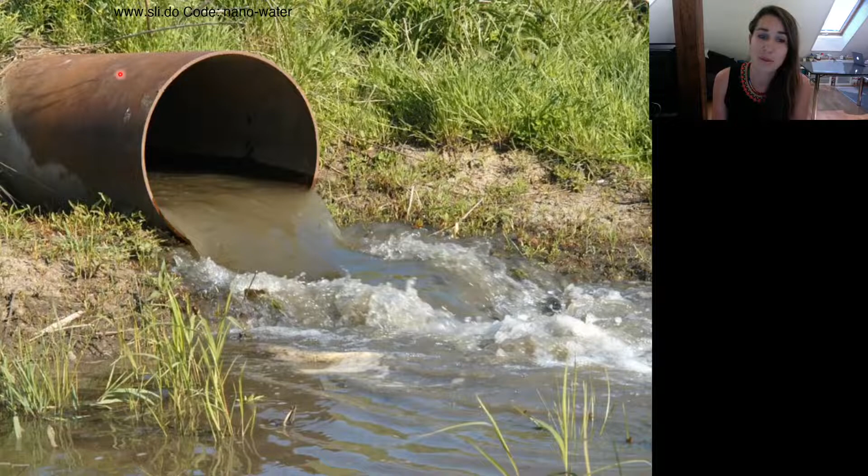Yet, we live in a resource-restricted environment and the population is growing, so we have to deconstruct our misconception about wastewater and understand that it's urgent to see it as a resource. The deconstruction is, however, difficult. Wastewater is not the most glamorous topic ever, so it's smelly, it's disgusting. It's not the type of topic you bring to make new friends at a dinner, especially at a dinner. So why is wastewater so taboo?

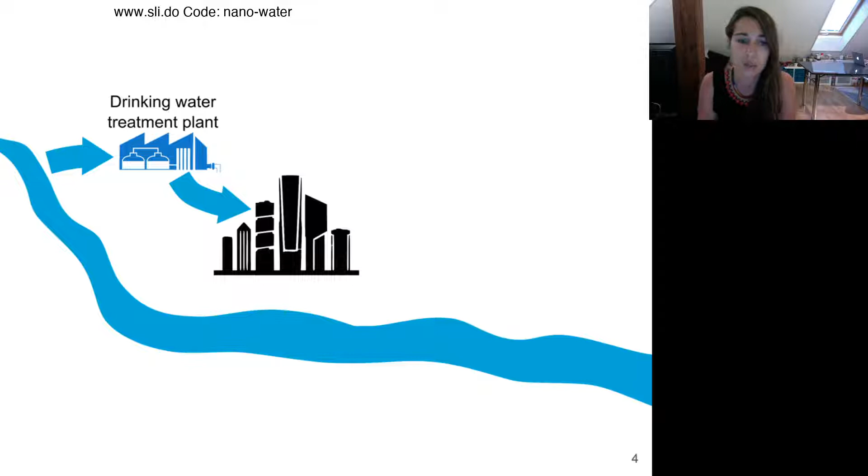It's because for centuries and still now in most cities, we have a linear water management scheme, meaning that we withdraw the water from the environment, a lake, a river, groundwater, and we treat it through the water treatment plants to supply the city. After consumption, wastewater is collected. At this point, most of the consumers only have a vague idea of what is happening with wastewater.

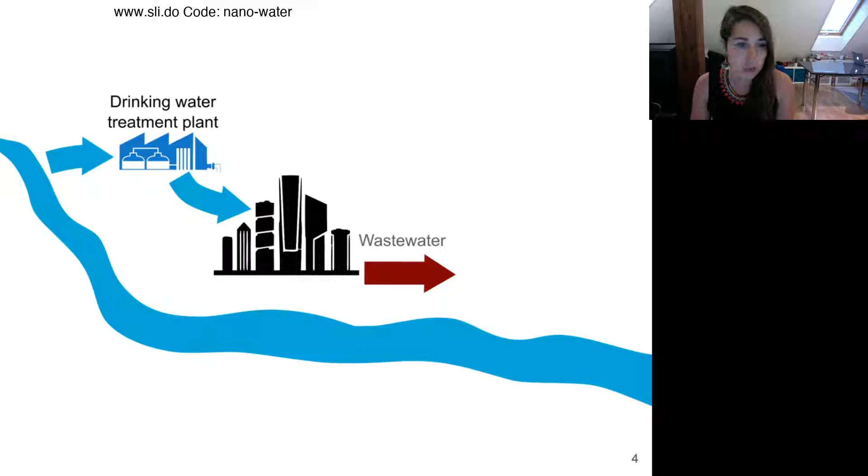And the fate of wastewater is linked to what it contains. So wastewater is made of water, carbon, nitrogen, and phosphorus. It also contains bacteria, viruses, or other chemicals, but today I really want to focus on these four constituents. And because of the presence of carbon, nitrogen, and phosphorus, we cannot return the wastewater directly to the environment, and this is why we need a

treatment. And the goal of the wastewater treatment plant is to remove carbon, nitrogen, and phosphorus. So carbon and nitrogen are removed as gaseous waste using biological processes, and phosphorus is eliminated as a solid waste through biological and chemical processes. After treatment, we return to the environment a good quality water. To give you an idea, each day, each person consumes 150 liters.

And if we scale up, taking the example of Switzerland, it's 500 million cubic meters per year, the equivalent of 150,000 Olympic swimming pools of good quality water which are returned to the environment instead of being used as a resource. And in fact, we already use it as a resource, but indirectly, because the city downstream will use the river water as a drinking water source, but it already contains treated wastewater.

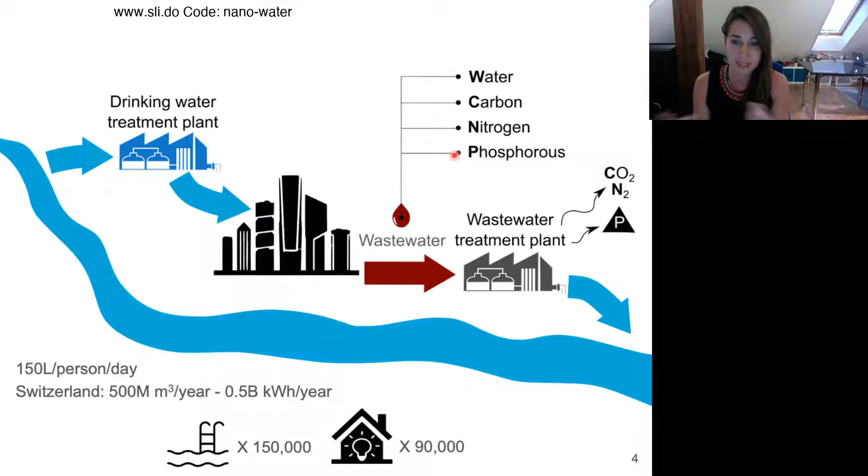And the energy is not only used to return a resource to the environment, it's also used to degrade other resources: carbon, nitrogen, and phosphorus. For example, nitrogen and phosphorus are used in agriculture already. So we see that this linear water management stream is not sustainable anymore in a resource-restricted environment. So it's important to find ways to recover these resources for our needs as a society, but also to limit our impact on the environment.

So what are the solutions to do that? Well, one solution is to rethink our buildings. So I introduce you to the example of the Nest. The Nest is the research and innovation building of EMPA and Eawag, located at Dübendorf. And the concept behind the Nest is that, contrary to conventional buildings, you have, we don't see it here, a fixed central part. And on these fixed central parts, you have these concrete platforms where you can plug and unplug units based on the material, technologies, or space needs you have for the building.

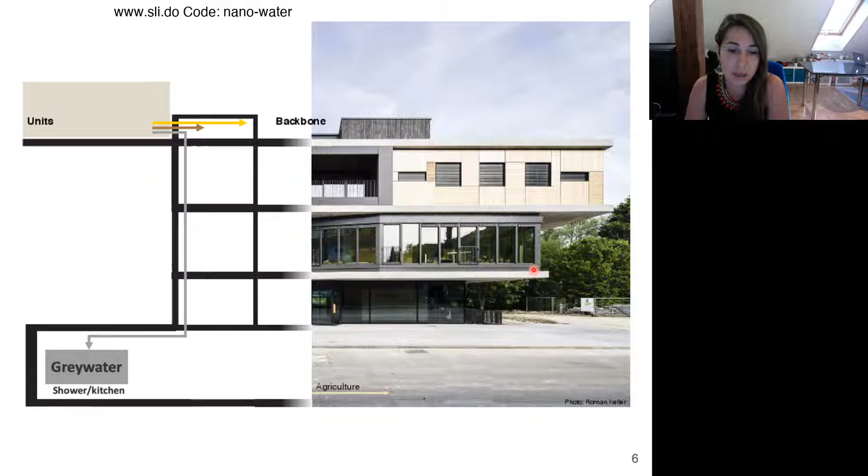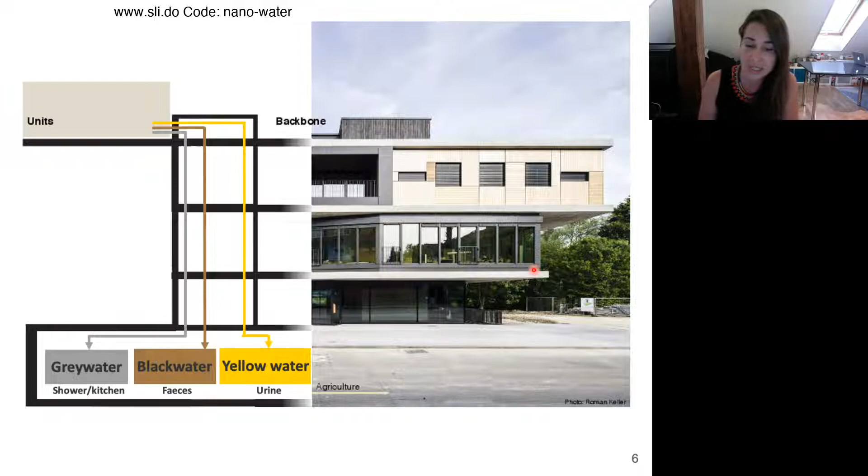And this building is really interesting in terms of water management. So instead of having only one wastewater pipe, like in conventional buildings, in the Nest we have different pipes for different types of water usage, and the treatment is made on site to use the valorization products for the building needs. So what kind of streams do we have? The first one is grey water, coming from the water we use for shower and kitchen. Then we have black water coming from the feces, and finally yellow water coming from, well, the urine. This is what we call source separation, and it's very interesting because it simplifies the recovery of the water, carbon, nitrogen, and phosphorus. So how do we valorize them?

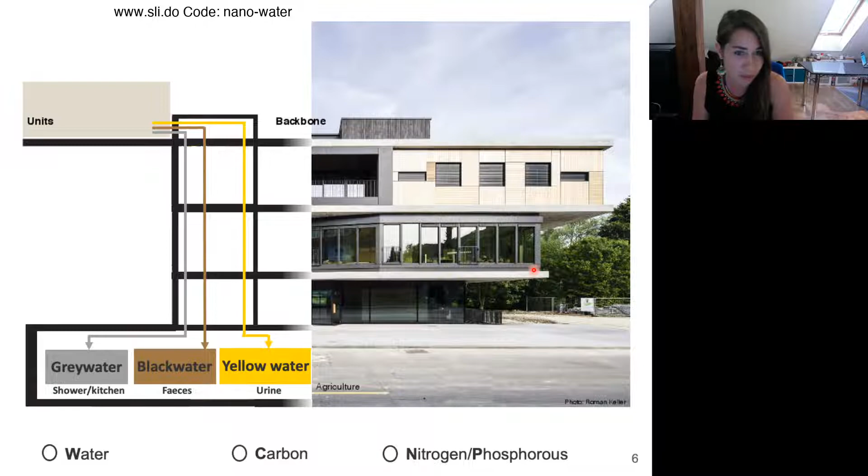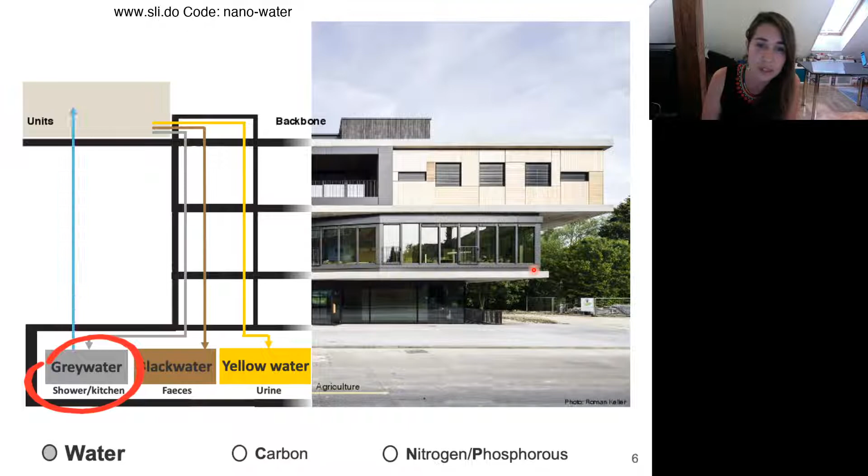I will start with grey water. And grey water is mainly water. It's around 65% of the wastewater we generate, but it contains only diluted soap or grease. So it's a very good candidate to recycle the water in the building. There are different types of technologies implemented to treat grey water. Often they are implemented in series. And I want to present you one of them because it's often used for grey water treatment, and it's one of my specialties.

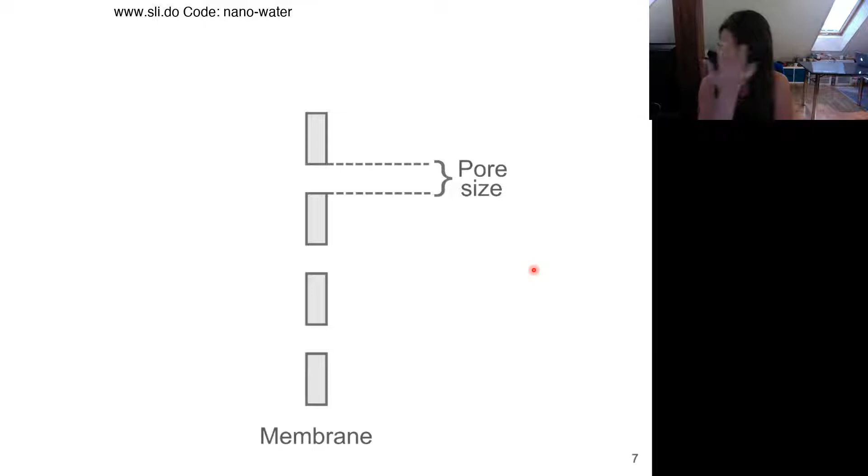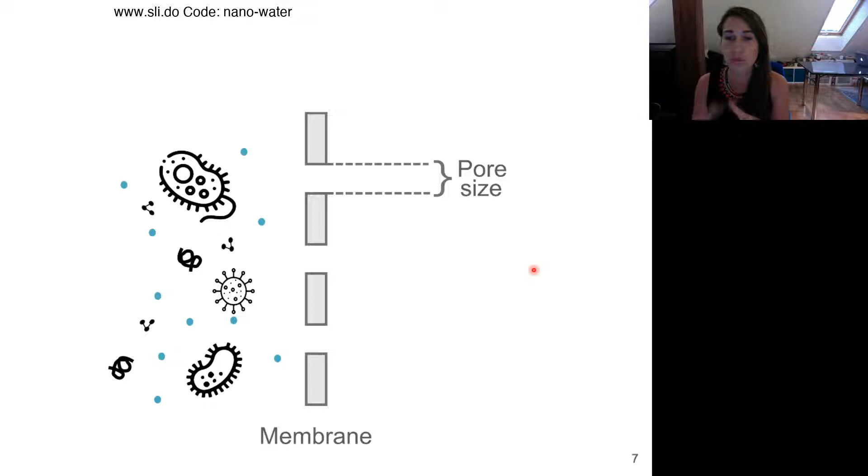So it's this. It's not just a random piece of paper I grabbed on the table, it's a membrane. So you have flat sheet membranes, and you also have these tubular membranes or hollow fibers that look like spaghetti. And so what is a membrane? A membrane is a porous material used as a physical barrier implemented to filter the water. So when you have water which contains contaminants, you can filter it through the membrane with the help of a pump, which will apply a pressure. And the quality of the filtered water depends on the pore size of the membrane. So for example, this bacteria is bigger than the pore size, so during filtration it will be rejected by the membrane, while smaller molecules like water pass through the pores.

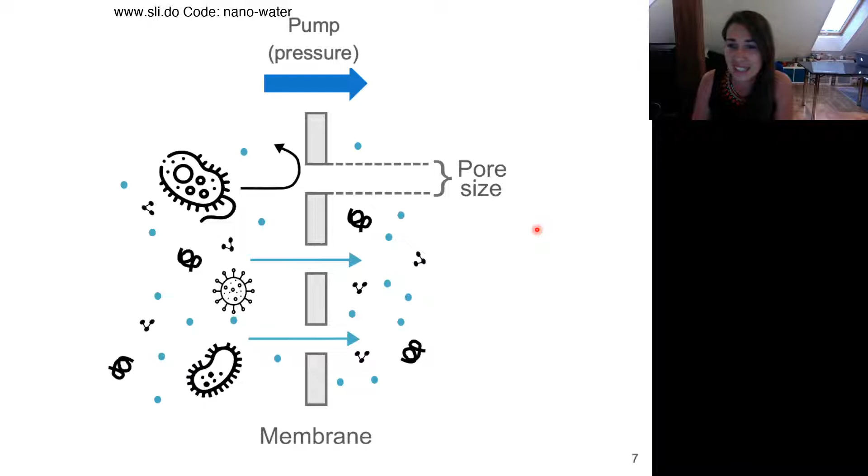So this process is really interesting to produce high quality water. However, there is always a but. Bacteria tend to accumulate onto the membranes, and gradually they will clog the pores. And the clogging is even worse because of the pressure of the pump that will really compact this biofilm. So at some point, water is not passing through anymore. And to prevent that, we use chemicals. So membranes, even though they're interesting, need chemicals and energy. So this represents a price, and this will consequently increase the bills of the inhabitants of the building.

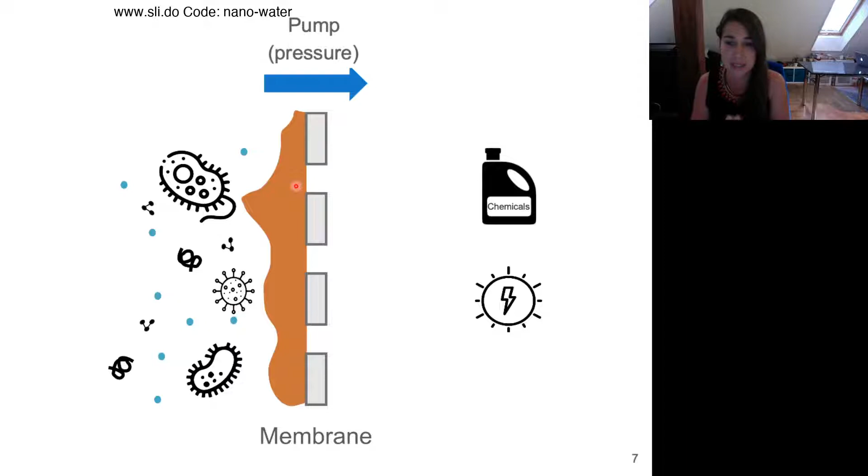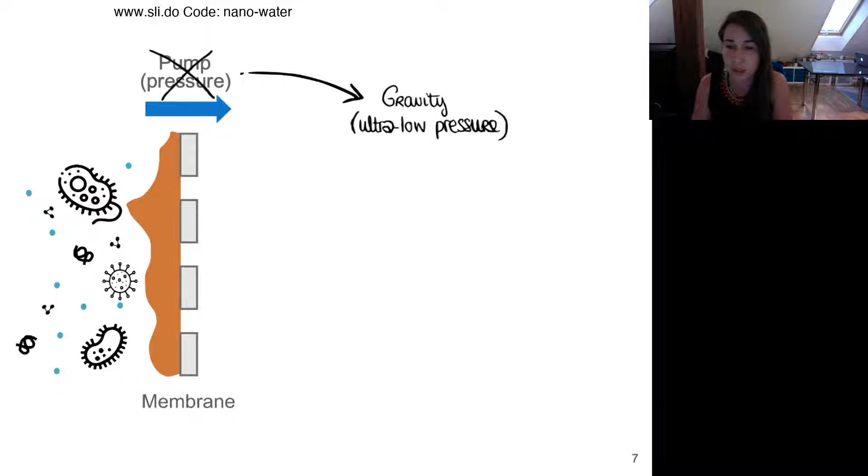So how do we decrease the bills? Well, at Eawag, we are now trying to see if it's possible to remove the pump and use gravity or ultra-low pressure for filtration. This way we don't need energy anymore. And we also want to stop using chemicals and just accept that bacteria grow on the membrane. And when we stop the maintenance and don't have the pump anymore, what happens is that the biofilm gets porous in comparison with conventional membranes, and water channels are formed, which allows water filtration. So filtration is a bit slower than conventional systems, but if we increase the surface of membranes, we can produce big amounts of water.

And another very interesting point of letting the biofilm, the bacteria, be is that we can work with them. Because bacteria consume some molecules which we don't want in the filtered water, but which, without bacteria, with the classical membrane, would just pass through. So this system is cheaper and produces higher quality water. This is well studied for drinking water, and now we are trying to implement this for grey water. And I just started the experiment yesterday, so we will see how it's working.

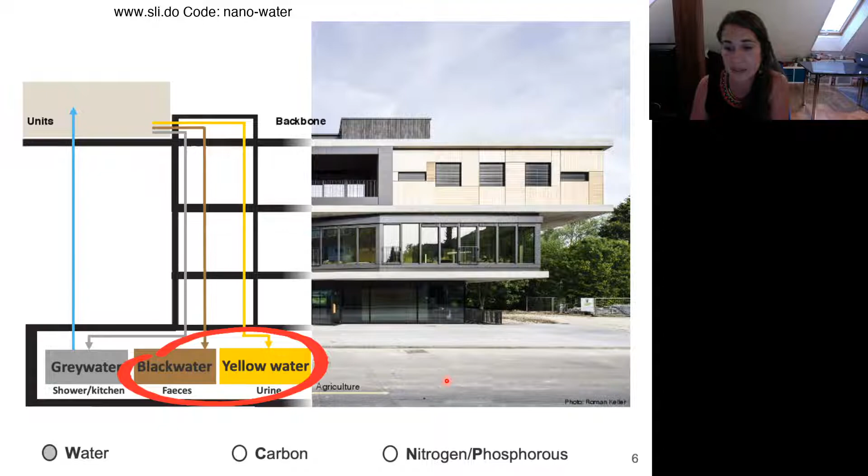Now, what do we do with black water and yellow water? Well, before doing something with it, we have to separate them. And to separate them, well, we need toilets. And these toilets are not conventional toilets, they are source separation toilets. So, how do they work?

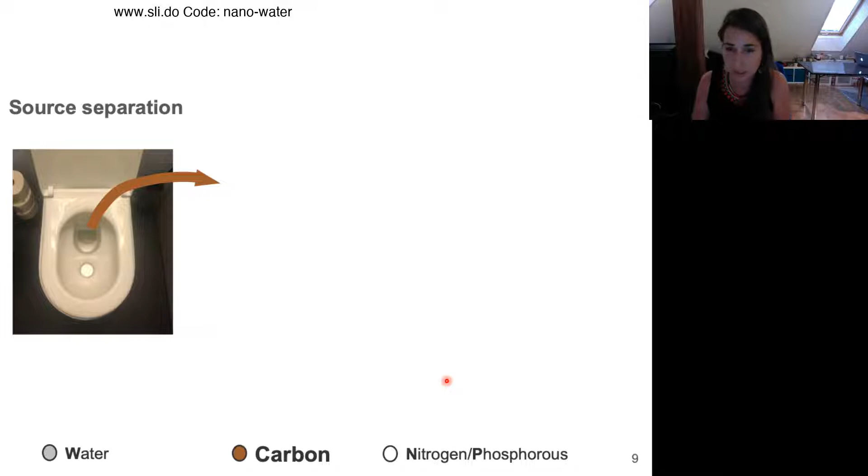In the back here, we collect the feces with the water, and the feces is the main source of carbon in wastewater. So in the basement of the building, the idea is that we separate the water and the feces, we press the feces, and then we obtain these pellets. And these pellets can be used for the heating of the building.

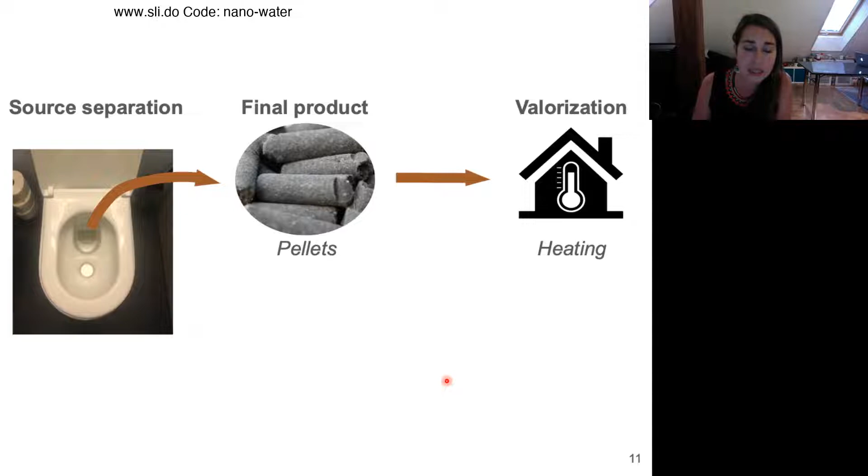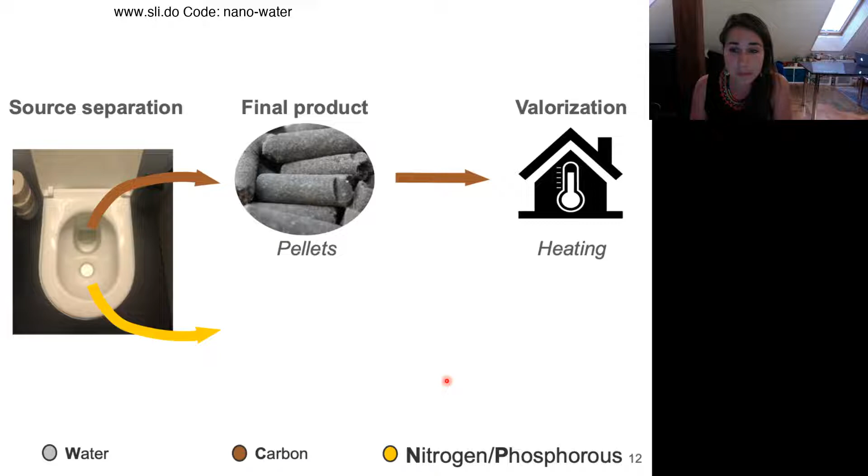In front of the toilets, we collect the urine, which is the main source of nitrogen and phosphorus in wastewater. And Eawag worked on the development of a process to stabilize, concentrate, and disinfect the urine. And the final product of this process is Aurin fertilizer. So this fertilizer is now commercialized and produced by Vuna company. Vuna company is a spin-off of Eawag.

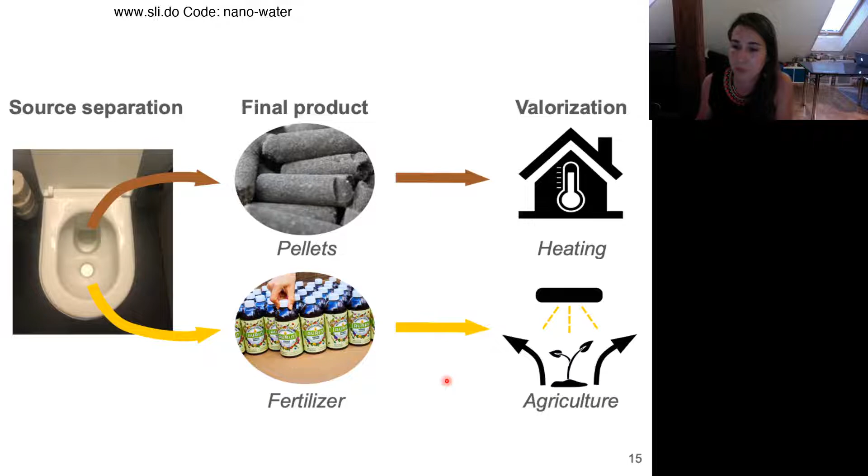And it's really interesting because since 2018, this fertilizer is licensed as a fertilizer by the Swiss Federal Office of Agriculture. So you can grow flowers, but you can also grow vegetables with this fertilizer. There is no human risk associated to it. So with urine, we can basically supply fertilizer for agriculture.

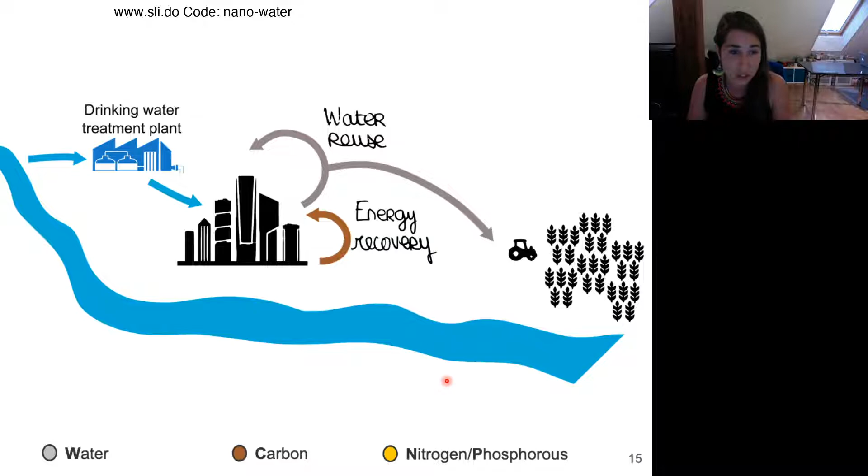So we saw that it is worth to change our mind or to rethink the way we build buildings, and also to change our mind about how we see wastewater and how we manage it. So in wastewater, if we separate the wastewater, we can use grey water to produce water for the city needs or agriculture. From the feces, we can produce pellets for energy recovery. And finally, the urine can be used for fertilizer production.

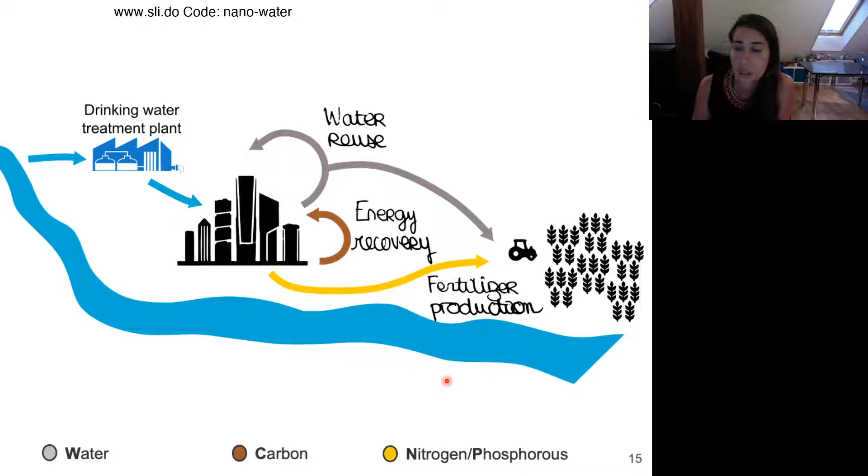So we see that it makes sense to take wastewater as a serious society topic, but it also makes sense to take it sometimes a bit less seriously, like our research group did during the last Eawag Christmas party. And I believe that it's really important to make fun about wastewater because it helps us to spread the word about its interests and also to break the taboo. So obviously, dressing as pee and poo cards is not the only way to break the taboo. Another way is to remind that we can close the loop and that wastewater can be a resource.

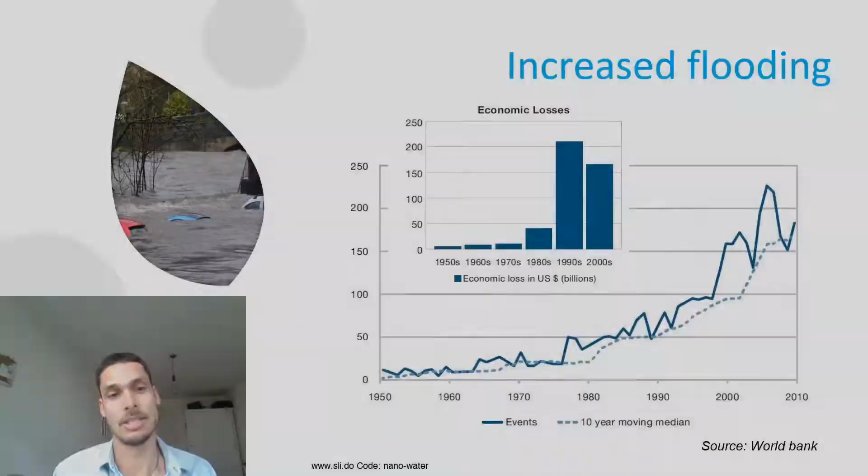The damage caused by floods has increased even more over those 30 years. And this is also projected to increase even further into the future. Now, cities are actually the places where these effects are felt the most, just because of their density of population and density of property that can be damaged. At the same time, cities around the world are grappling with the effects of increasing droughts.

In 2018, the Cape Town government announced the coming of day zero, where the water would run out. And at the beginning of this millennium, we had a very severe drought in Australia called the Millennium Drought, where there were very severe water restrictions being put into place. But also here, we're actually for the third time in a row in a drought in spring in Europe, and you can see the effects that it has on my lawn.

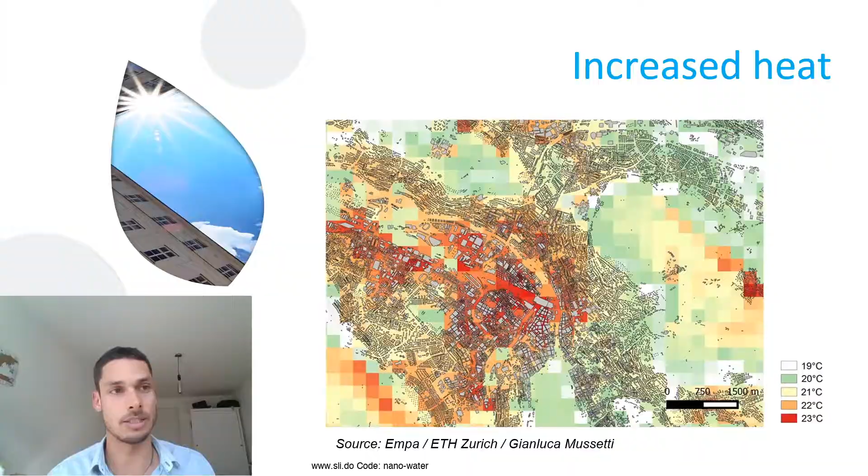The following problem might not resonate so much with people in Switzerland because the waters here are crystal clear, but in large parts of the world, cities are not blessed with these clear waters. So I remember living in Sydney, close to Coogee Beach, which is one of the most famous beaches of Sydney, probably the most famous after Bondi. That after a long dry period, followed by an intense rain, there would be a newspaper advertisement saying, "Don't go swim on Coogee Beach."

And this was actually caused by the stormwater that was released into the ocean, because Coogee Beach is right next to the outlet of a stormwater sewer. And so the pollution that then washes off from the urban surfaces includes mostly phosphorus and nitrogen, which has a negative effect on the biodiversity in water, but also things like heavy metals and even pathogens, which makes the water very unsafe to swim in.

Increased urbanization, of course, leads to a decreased amount of green space, which actually has a very significant impact on people's health and well-being, besides, of course, the decline in biodiversity. Now, there are some exceptions of cities that have a lot of green space, such as Moscow, Singapore, and Sydney, where almost half of the city is covered by parks and gardens. But in a majority of cities, this percentage is much lower. And in extreme cases such as Dubai, Istanbul, and Mumbai, this percentage is only 2.

Now, all this havoc is caused by two main drivers. The first one being climate change. Climate change leads to more intense rainfall, causing floods, but also longer dry periods, causing droughts. And it leads to more and longer heat waves. Now, climate change is an external driver that local governments, city governments, can't really influence. So that is the bad news.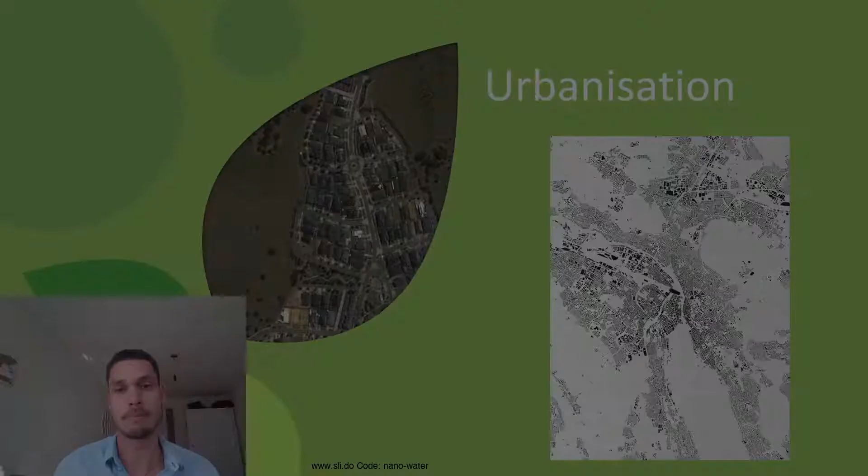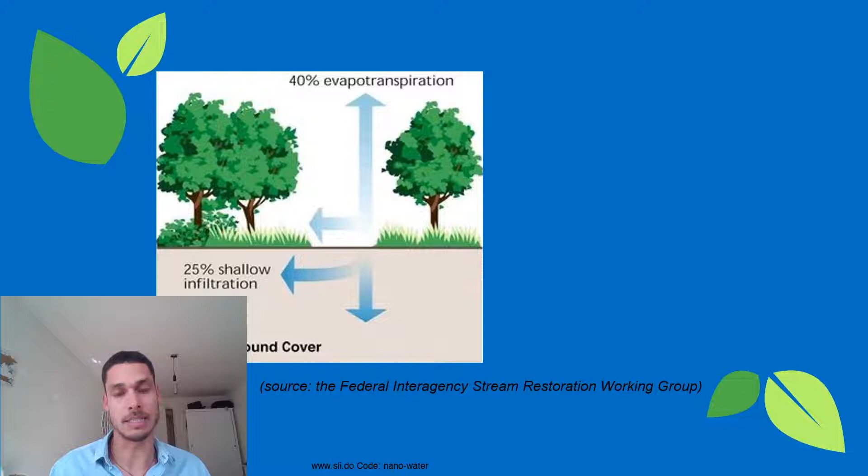In a natural environment, this is what happens to rain. About 40% of it evapotranspirates, then 25% of it infiltrates into the soil and is available to plants to grow, and 25% goes into deep infiltration into so-called aquifers.

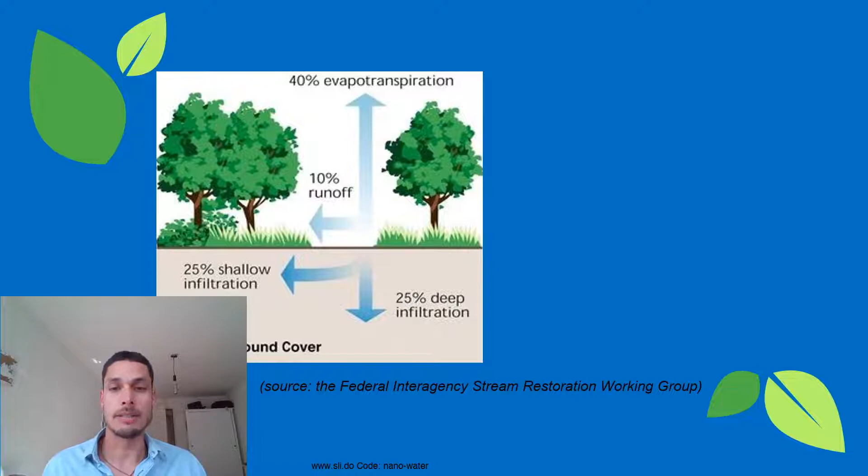Then 10% remains, which runs off into rivers. Now, in an urban environment, this water cycle is heavily altered. So of the rain that falls in the city, about 30% is evapotranspirated. 10% goes into shallow infiltration in the soil. 5% goes into deep infiltration, which leaves about 55% to run off directly into rivers.

So this heavy increase in runoff makes cities much more prone to flooding, while the decrease in evapotranspiration actually helps make cities more hot because evaporation cools down an environment. And then the decrease in the infiltration actually makes cities also more prone to droughts because there's less water stored in the soil that can be used in periods when it doesn't rain.

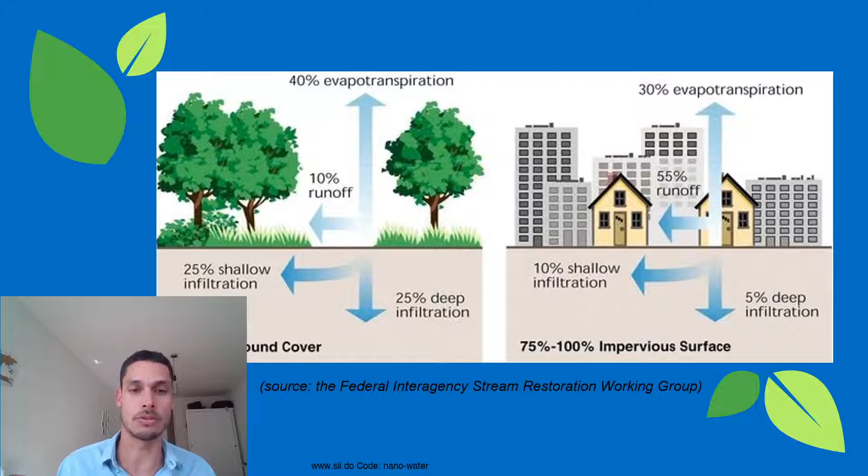So in order to decrease all these problems, we want to actually move from the situation on the right back to the situation that is more natural on the left. But how can we do this? One way of doing this is to move away from the traditionally used gray urban water infrastructure, where we put the water literally in the gutter and then it moves to the sewer system and as quickly as possible into the urban waterways, to move to more decentralized green-blue infrastructures.

Now, these green-blue infrastructures can simply be parks with a lake or a garden with a pond. But over the past few decades, civil engineering research has focused on designing green-blue systems that are specifically made to improve the processes of bringing the natural water cycle back into the city.

These systems, such as wetlands, bioretention systems, and green roofs, retain the water in the city, and thereby it has more time to infiltrate into the soil, it has more time to evaporate and cool down the city, and it can also be used to recycle and, for example, irrigate urban spaces like sports fields.

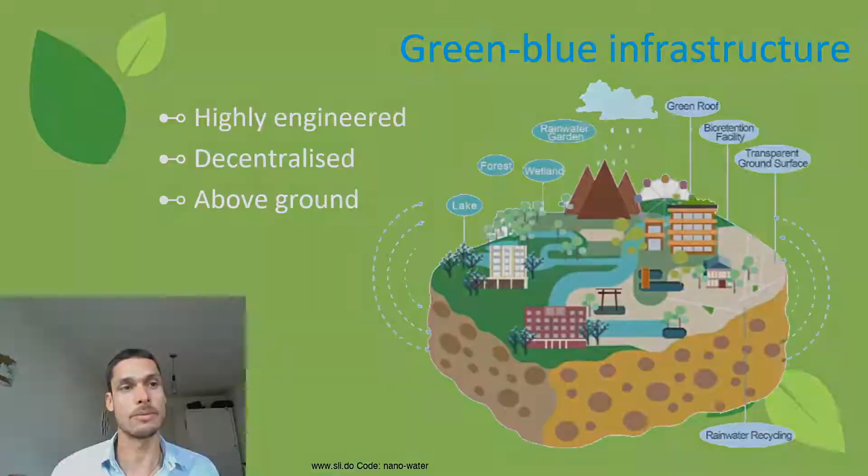And then it goes through several layers of filter media that take out some of the pollutants that can be found in rainwater, in stormwater. And at the same time, they're planted with specific plant types that take up the phosphorus and nitrogen, which are two of the main pollutants found in urban stormwater. And plants use these nutrients to grow.

Once the water filters through this biofilter, it can then be infiltrated safely, or it can be put into a sewer and released into the natural waterways, or it can even be recycled and used to do irrigation, for example.

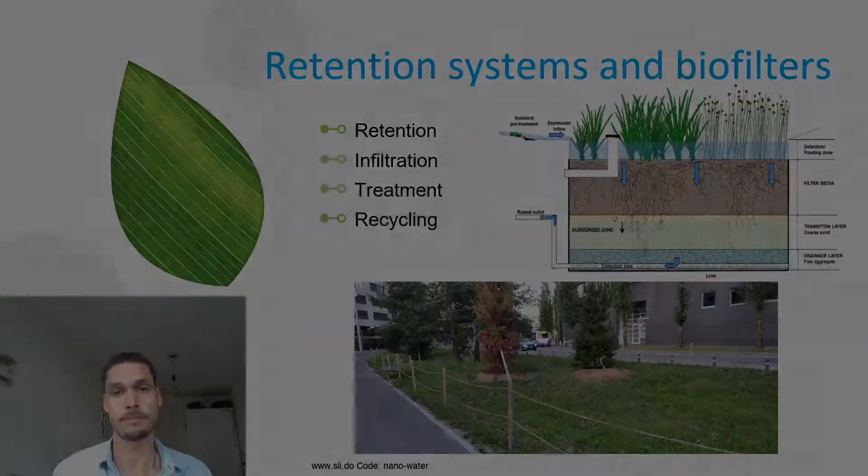And then at the same time, the water will stay in the lake for an extended period of time, which means that the coarse material, the coarse pollutants, will slowly sink to the bottom, and the water that then flows out of the lake eventually back into the natural waterways is cleaner than when it came in.

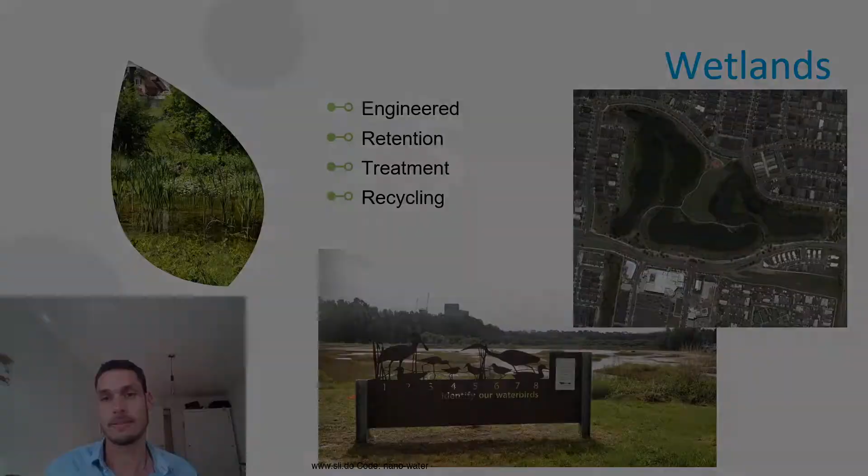And these systems are actually ideal for places where there's not a lot of space, so in dense urban areas, because they can just be built on buildings themselves. And if they're designed properly, they can fulfill the same function that an urban wetland, for example, does, because they can retain the water, they keep the water in the city, and slowly treat it, clean it, and then release it.

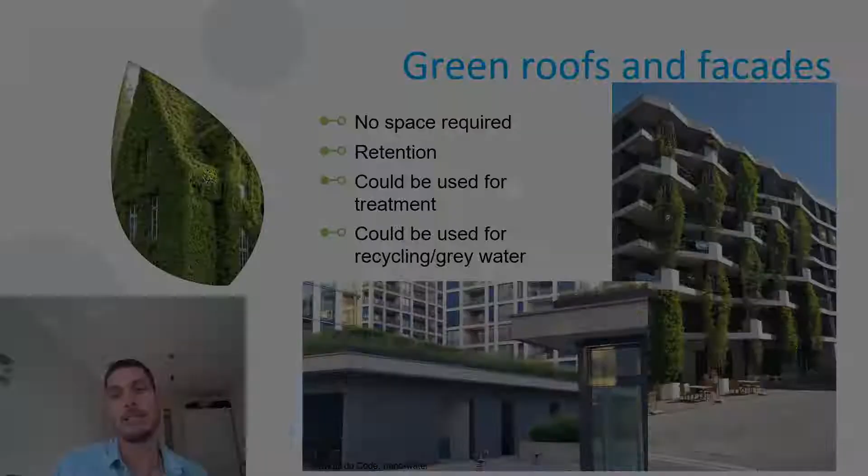Cities around the world have started implementing these systems, although very slowly over the past decades. But they're called differently in every part of the world. Here in Europe, they're called nature-based solutions, while in Australia, where I studied them, we refer to them as water-sensitive urban design. In China, they use the analogy of a sponge, which I personally find really apt.

So they call it Sponge City, and they're currently investing billions of dollars to turn, I think, 38 major cities into these so-called sponge cities. In the United States, these systems are referred to as low impact development, whereas in the United Kingdom, they use sustainable urban drainage systems. So it's called differently everywhere, but it all refers to the same thing.

All the different approaches and different technologies have a few things in common. They'll use plants, and they retain the water and clean the water. They recycle the water, and they're decentralized and therefore more flexible, increasing the resilience of cities, buzzword. And they have a large number of economic and environmental benefits.

So economic benefits include flood protection, which leads to lower damage costs, but also it has actually been shown that houses around rain gardens or biofiltration systems, this study was done in Sydney, are actually tens of thousands of dollars more in value than without those rain gardens. So there's these direct economic benefits.

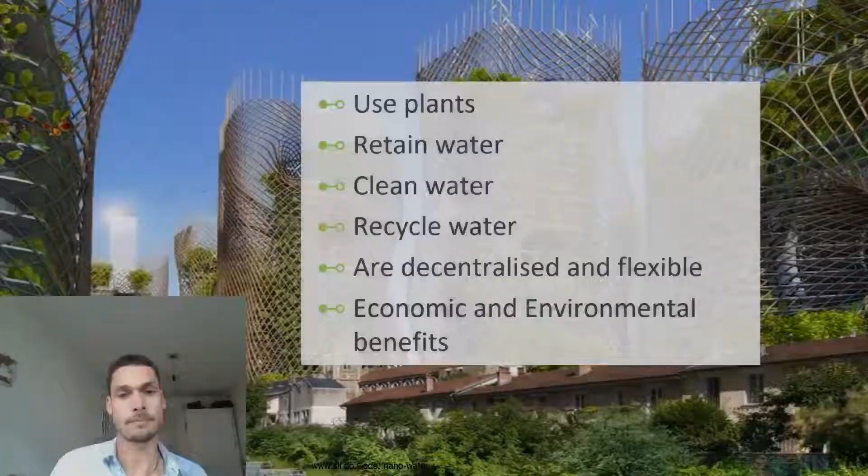So if we know all these benefits and we have these technologies available to us, why aren't we using them more? Well, the answer is simple. The current traditional urban water systems are underground, while these green infrastructures are above ground, and so they're not so simple to implement, especially in dense existing urban areas. To make these systems successful, there's a lot of different things that need to be considered in the urban planning.

For example, what is the local hydrology? Where does the water flow to? What is the slope? But also, what is the acceptance of the people that live around these systems? Will they be able to appreciate these systems? Where is space available? And what is the price of land, and can we afford to build a system there?

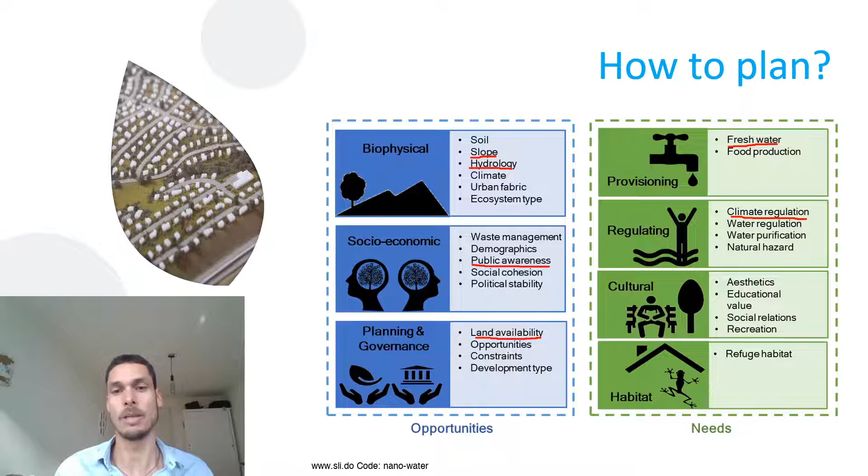But on the other hand, also, where do we need all these benefits that we get from the systems? Where can we use the recycled water, for example, to irrigate sports fields? Or where are the hottest spots in the city that we can cool down using these systems? Where is there a big lack of green space, and where could the city really benefit from increasing this green space? And even where are biodiversity hotspots? So all these things need to be taken into consideration when we place these systems in the city.

Because the planning for these green-blue systems is so highly complex, in many cases, urban planners resort to what they know, which is just implementing gray systems, sewer systems. And even if they implement green-blue systems, they often do it very randomly. So they just place them wherever they find space or wherever they're redoing a park. So because of this, a lot of people in academia have started thinking of ways to help urban planners improve their planning processes. And one of these people was myself in my PhD.

And what I've come up with is a very simple spatial tool that is called SSANTO, a spatial suitability analysis tool, which gives urban planners this map, which you can see here, that has a simple color code indicating what are the very highly suitable and the less suitable locations to implement a specific green-blue system in the city.

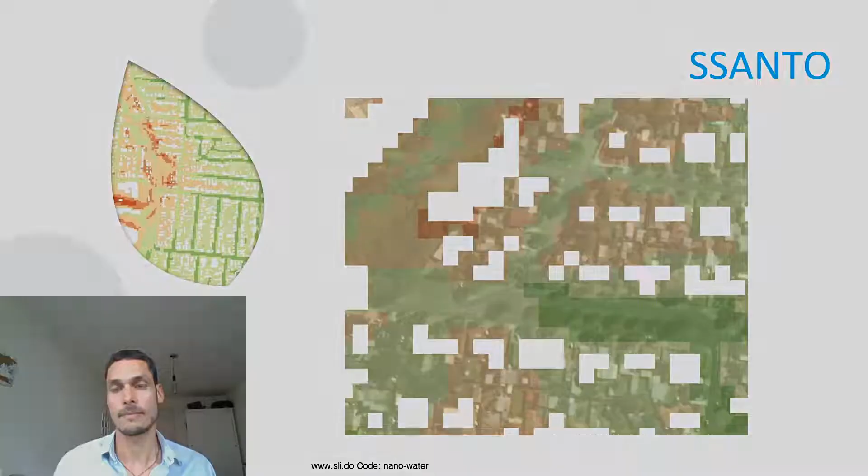Slowly, cities around the world are becoming more green-blue, and the good news is that everyone at home can actually contribute, for example, simply by removing tiles from your garden and putting a plant in place. I know in my home country, they actually have a program where you can bring tiles from your garden to the municipality, and in return for these tiles, you get free plants to put back in your garden.

Recently, only like 2 weeks ago, I saw on the Swiss news actually that the city of Zurich is also implementing a big urban greening program, which I was really happy to see. Their focus is more on urban cooling for the hot summer days. But the principles are all the same, and the increase of green-blue spaces will also help with all the other issues that cities are facing.